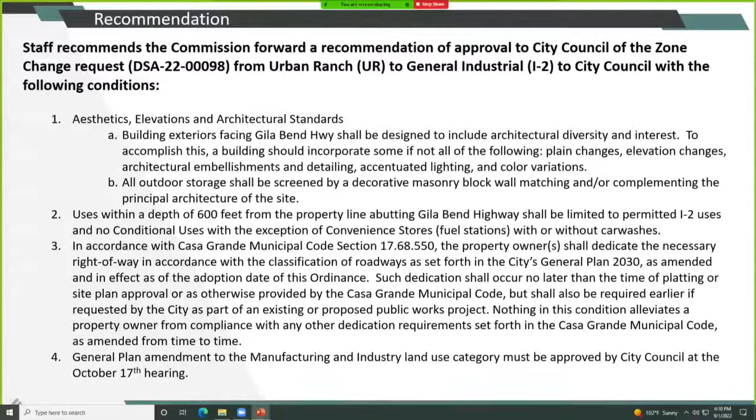Our second condition is that uses within a depth of 600 feet from the property line abutting Gila Bend Highway shall be limited to permitted I-2 uses and no conditional uses, with the exception of convenience store fuel stations with or without car washes. So we're limiting some of the uses happening along that main frontage of Gila Bend Highway. The third condition is our standard right-of-way dedication request. The fourth is that this zone change not be approved unless the general plan amendment to the manufacturing industry category is approved by City Council at the October 17th hearing.

And I'd be happy to take any questions. Questions for staff? No questions for staff?

All right, at this time then, would the applicant and/or their representative like to come forward? Please state your name and address for the record.

Thank you, Mr. Chairman and members of the commission. My name is Greg Davis with iPlan Consulting, address 3317 South Higley Road in the town of Gilbert. Thank you for the opportunity to be here. This is, I think, the third time now we've been in front of you, and we still don't have anything to add, but we'd be glad to answer any questions. We have reviewed the stipulations and are comfortable moving forward with those. So any questions you have, I'd be happy to answer them.

Any questions for the applicant? No? All right. All right. Thanks, thank you for coming down, yeah.

All right, then at this time, I would open it up to the public. Would anybody from the public like to speak to this agenda item?

Seeing nobody, I will close the public portion and bring it back to the commission.

Mr. Chairman, Member Peters. I would like to make a recommendation of the commission to forward a recommendation of approval to City Council of the zone change request DSA-22-00098 from Urban Ranch to General Industrial, I-2, to the City Council with the following conditions that were laid out by the staff. I'll second that motion.

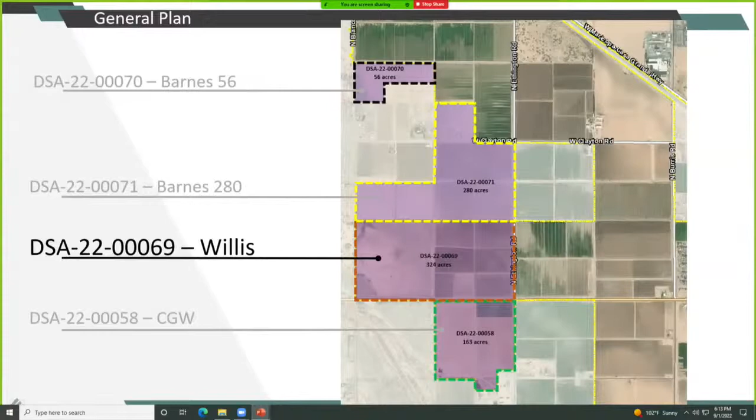You can see the site located here just north of the first site we discussed, 324 acres, heading into the manufacturing industry category. The zoning's going from urban ranch to I-2, similar to the previous request. Again, all the review criteria is exactly similar to the previous request.

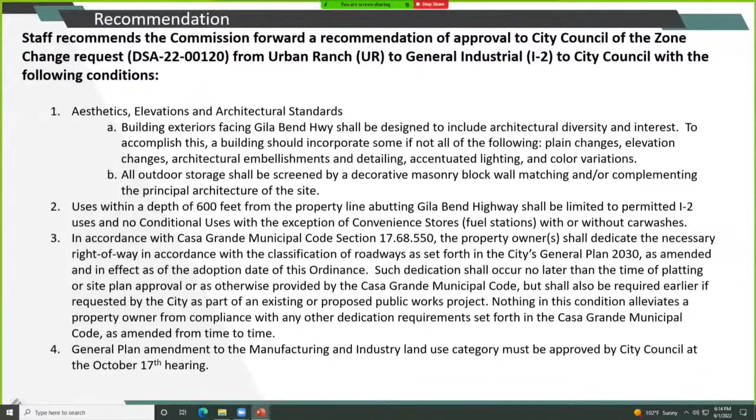In regards to notification, we met or exceeded all requirements and did not receive any comments regarding this request. In conclusion, staff recommends the commission forward a recommendation of approval to City Council of the zone change request from urban ranch to general industrial, with the following conditions. Again, the conditions are exactly the same as the previous. I'd be happy to answer any questions.

All right. Do we have any questions for staff? Okay. This time then, would the applicant and/or their representative like to speak? Thank you for being here this evening.

Good evening, Chairman and Commission members. Cindy Paddock, Hilgart Wilson, 2141 East Highland Avenue, Phoenix, Arizona. I think Joe did a good job summary. Third time we've appeared before you, similar to Greg ahead of us. No new changes, no information. We have no objections to the staff report. Staff's been great to work with, and we look forward to the hearing in October.

All right. Any questions for the applicant? No? All right. Thank you. Thank you.

At this time, I would open it up to the public. Would anybody from the public like to speak to this agenda item? Seeing nobody, I will close the public portion and bring it back to the commission.

Mr. Chairman, I must keep going with this. There you go. It's all yours. I would like to make a motion that the commission forward a recommendation of approval of the City Council of a request by Hilgart Wilson for a zone change DSA-22-00120 from urban ranch to general industrial located at Gila Bend Highway between Bianco Road and Effington Road, with the recommendations as listed by the staff.

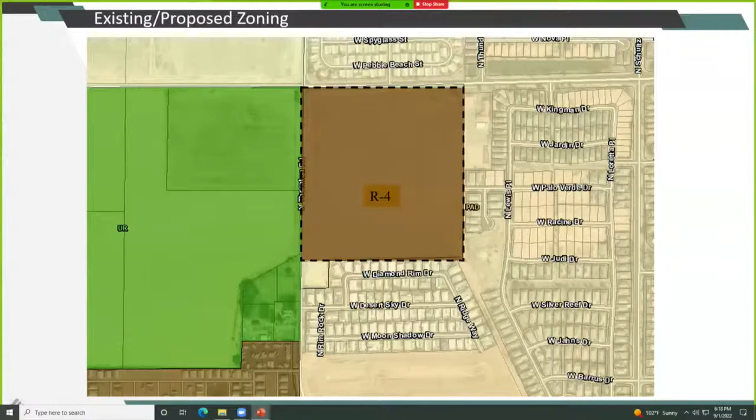In regards to the general plan, currently neighborhoods, but it's processing the request into the community corridor land use category. The existing zoning's R1, proposed zoning is R4. The R4 zoning is allowed in both the neighborhoods category and the community corridor category.

In regards to the review criteria, again, we look to make sure that it's in conformance with the general plan. All of that has been covered in your staff report. We'll just concentrate on the top one, and that's the action is consistent with the city's general plan, including the

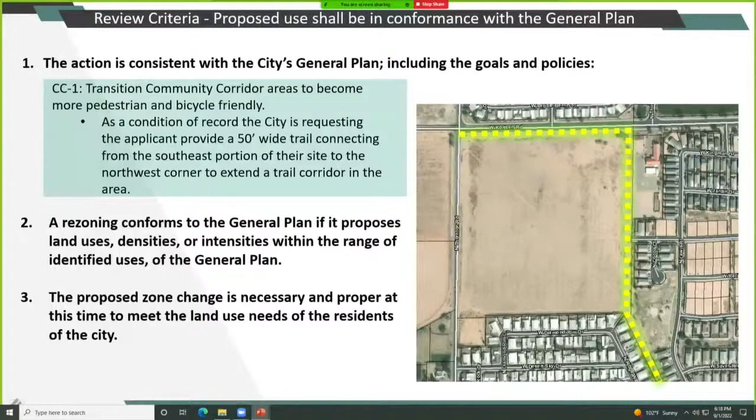goals and policies. CC1 in our general plan goal is transition community corridor areas to become more pedestrian and bicycle friendly. As a condition of record, the city is requesting the applicant provide a 50-foot wide trail connecting from the southeast portion of their site to the northwest corner to extend a trail corridor in the area. You can see that highlighted on your screen where that trail potentially could go. They just need to take it from that far southeast corner to the northwest corner, so they could propose a different alignment, but we think this is probably where they'll end up.

In regards to notification, we met or exceeded all requirements. We did receive 2 responses today and maybe yesterday by email, and the principal concerns were Thornton Road traffic and too much residential growth in the city. We did provide a handout to all the commissioners this evening of those comments we received for your review.

In conclusion, staff recommends the commission forward a recommendation of approval to City Council of the zone change request from single-family residential to mobile home residential, with the following conditions. The first one is the 50-foot trail corridor through the site, and the second one is our standard right-of-way condition.

Questions for staff? Do you have any questions for staff?

She was mentioning the condition, I'm missing the condition of the general plan being approved, but R4 zoning is allowed in both neighborhoods and community corridors, so I did not make that a condition of this recommendation. Okay.

No questions. All right. Well, then, at this time, would the applicant and/or their representative like to come forward?

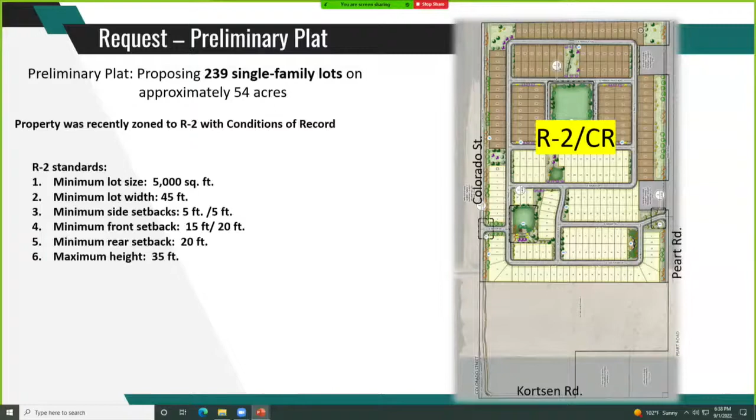When reviewing preliminary plats, there's a number of aspects we look at to make sure the preliminary plat is adequate, one being conformance with the zoning. As I mentioned, the R2 zoning allows a certain size of lot and minimum lot width, which is a 5,000 square foot minimum lot size and 45 foot minimum lot width.

This preliminary plat actually proposes lots a little larger than 5,000 square feet, ranging between 5,175 and 5,750 square feet. There's going to be 130 lots proposed to be 45 feet wide at 5,175 square feet, and 109 lots proposed with a minimum lot width of 50 feet at 5,750 square feet in size.

One of the other conditions of record associated with this R2 zoning is that it comply with particular PAD design guidelines, such as a minimum open space of 20%. This preliminary plat and the associated landscape plan shows an open space of 22%, so it meets and exceeds that requirement.

There was also some particular detail that needed to be addressed with regard to streetscapes, entrances, and perimeter walls, and that has been met during the review of the preliminary plat. Matters such as front yard landscaping, fence returns, and housing product will occur at a later stage. If this were approved, their next step would be final plat, and then at the building permit phase we would have the opportunity to review those other aspects.

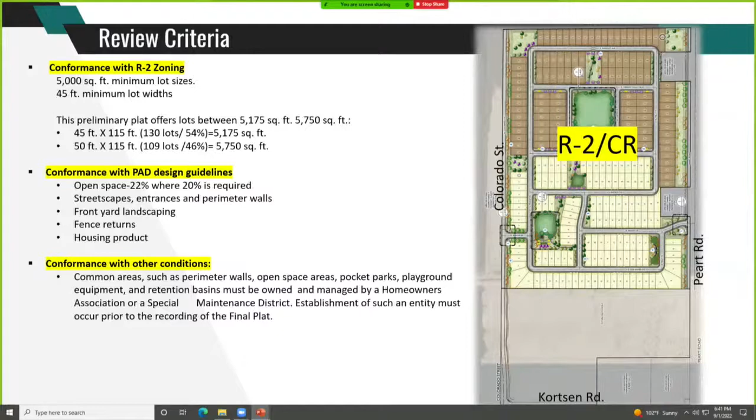However, there is concern about the area shown in blue, the 100-year floodplain. A CLOMR/LOMR will be required prior to final plat approval. That's a process done to place the entire area in a Zone X. One way the applicant proposes to accomplish this is by constructing a flood wall around the perimeter of the subdivision within that 100-year floodplain, protecting it from excess flows and runoff during a flood condition in the Santa Cruz Wash to the north.

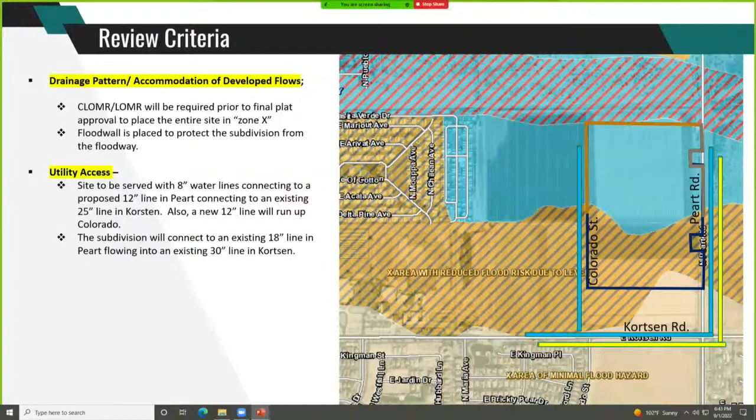The other aspect I want to talk about is utility access. The site is to be served with 8-inch water mains connecting to a proposed 12-inch line in Peart, and it will connect with an existing 25-inch main in Kortsen. They'll also run a new 12-inch water main up Colorado Street for a loop system. Regarding sewer, the subdivision will connect to an 18-inch main in Peart, which will flow into an existing 30-inch main in Kortsen.

The last item we look at with preliminary plats is access to public roads and trails. There are two points of access proposed in and out of the subdivision, one onto Peart Road and the other onto Colorado Street. Colorado Street will be extended north of Kortsen and will run to the northern boundary of the subdivision.

Because of the floodplain issues mentioned, where they're proposing a flood wall around the northern portion of the subdivision, access to the area to the north is restricted. That area is important because there's an existing regional trail, part of the Santa Cruz Linear Park Trail, and there's benefit in providing pedestrian connection to it. So instead of running a link through the core of the subdivision, they're proposing a 10-foot wide meandering path along the east side of Colorado Street up to that regional trail.

They are extending Colorado all the way down to Kortsen, but between Kortsen and the single-family area there's a future multifamily site that's not really part of this development. So the public improvements adjacent to the future multifamily site will be slightly less than those adjacent to the single-family area. There will still be a 40-foot half-street right-of-way dedication for Colorado and curb, but instead of a concrete 10-foot wide meandering path in that area, it will be DG. Once the multifamily site develops, that DG can be replaced with concrete, and that's when curb cuts and street lamps will be set in that area.

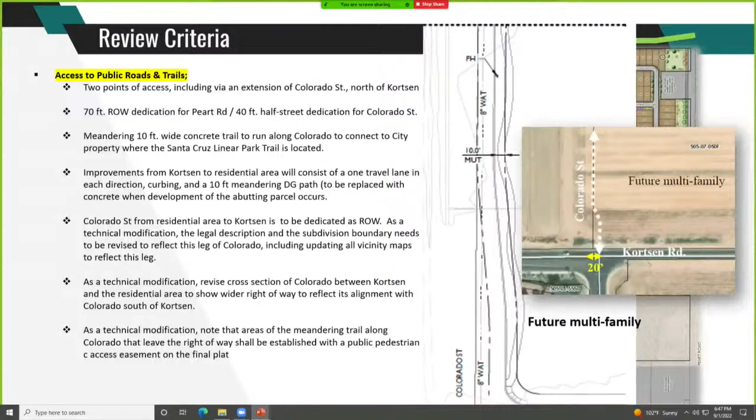The other criteria is compliance with subdivision regulations, which covers a variety of standards. It meets all of them except one requirement found in the subdivision code regarding block length. According to the code, blocks cannot exceed 600 feet, or 12 times the minimum lot width allowed in that zone district, which in this case is 540 feet. They have one street that is almost 883 feet, which prompts the need to request a subdivision variance.

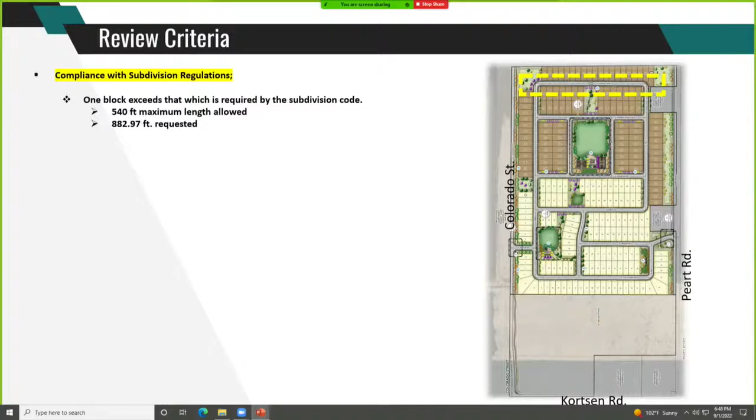The code does allow a variance to be requested. It would need to be granted by City Council, but Planning Commission would be making a recommendation to Council in association with the review of the pre-plat.

In reviewing the criteria, we found there are measures to help address the fact that it's an extra long street. You've seen a number of these requests in other presentations, but they are providing traffic calming measures known as chicanes in the center of the block that narrow the street and improve pedestrian connection. They are also providing a central open space area, so even though the block still exceeds 600 feet, you would essentially meet that requirement if there was a street there in lieu of the open space. But we feel the open space area serves a much better purpose, since that street wouldn't provide any real benefit for vehicular connectivity. This way, by providing the open space, it essentially breaks up the block, and there will be a pedestrian path through there.

I mean, to be better informed - you can see where, between the street, the drivable portion of the street and the sidewalk, there's an area that bumps out. But if you were to query chicane online, it's going to pull up not just that example, but sometimes it's done with plastic bollards and such. That's not actually what we're describing when we talk about a chicane. We're talking about a landscaped area that mimics the photo shown there.

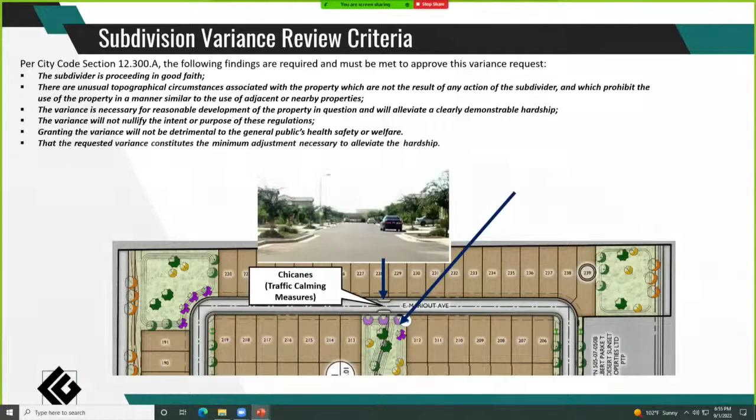I think we'd all appreciate if you could do a little look and see if there's something nearby that we could see, and share it with all the commissioners.

Sure. These are getting longer too. Yeah, it's just like when it was one or two, that was fine, but it seems like it's something - I'd just like to be better informed. I can see it, you've got great presentations, I'm not knocking them at all, but it'd be great to be able to see it actually in place.

Okay, thank you. So I will, but also real quick - I guess it's not technically a chicane, but within the Mission Royale neighborhood, I don't think it's actually Agua Fria - I think Google has the wrong street name labeled there - but it's the most northerly street just south of Florence Boulevard in the active adult community.

They have a mid-block roundabout. So although that's not a chicane per se, that's a traffic calming device, because such a long block creates a speedway. So having that infrastructure there, that little roundabout, it slows the traffic, albeit maybe briefly, but it helps control the speed.

If you could share that with us, that'd be great if you have any ideas about that. It's great too if you forgot something and needed to turn around and go back to the house real quick - did I shut my garage?

Any other questions for staff? You guys have? No? I just have a couple concerns.

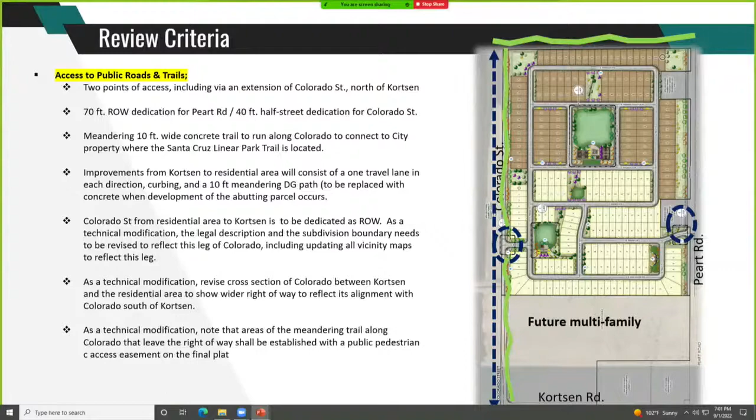So I believe the Dollar General store is right in there, and it has a cross-access, if I remember, going over to that corner where the well site is. That's on the very, closer to Kortsen. Right, because the Dollar General sits right on Kortsen. Yeah, so as I remember, we made them do a cross-access to the corner.

No, he was talking about how to get—you're talking about the multifamily, how to get in there. Well, so if you took the multifamily and said, okay, where's their ingress egress? You're talking about the well sites north, right? Yeah, he's talking about both—on PERT. The well sites on PERT, depending on who you are and how you want to pronounce that, but I call it PERT.

And then, similar to this subdivision, if they were going to do an ingress and egress, and they did one on Colorado and one on PERT, now we've got those two entrances very close to each other. If the PERT ones—I'm not as concerned about the Colorado one, but that's going to be a heavy flow, a lot of traffic.

So I'm not sure what you're asking. My first concern is, do we have a conversation about moving that ingress egress on Peart further north? And then my second question, which doesn't have anything to do with that, is I just don't know what the rules are for allowing the well sites access off of Peart, and does that complicate lots of entry points.

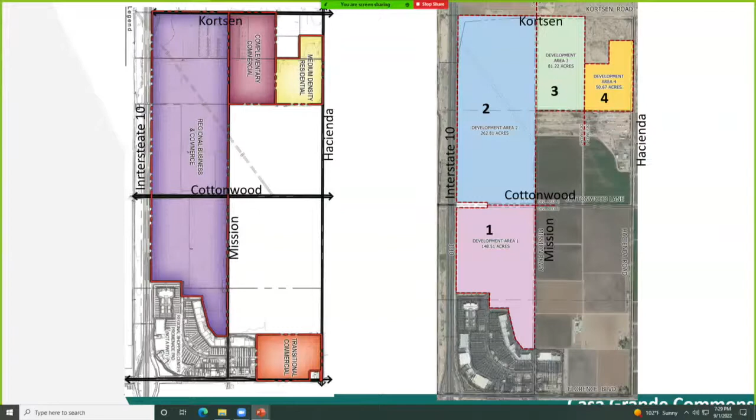Really the impetus for what's driving the amendment is the fact that there was a general plan change done a number of years ago. The current PAD was approved when this area was designated as commerce and business in the general plan, and at the time, commerce and business did not allow any residential development as part of a PAD.

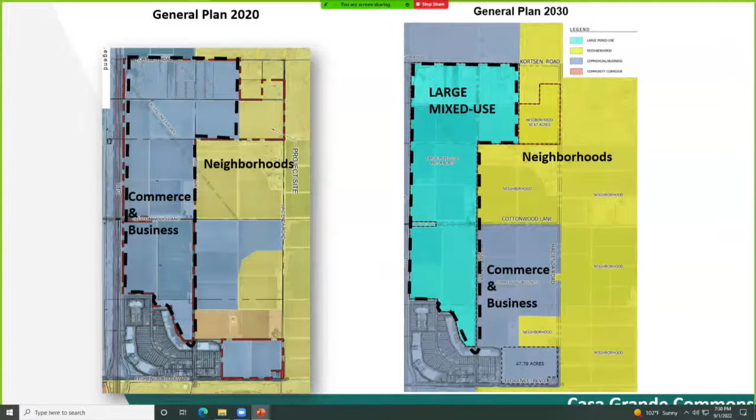In 2019, we created a large mixed-use general plan category, which does allow a vibrant mixture of different uses. This area actually did undergo a major general plan amendment at that time to place the bulk of the PAD into large mixed use, and that was carried forward with our general plan 2030. So now this next step is for them to revise the PAD and introduce uses that are in line with that approved large mixed-use general plan designation.

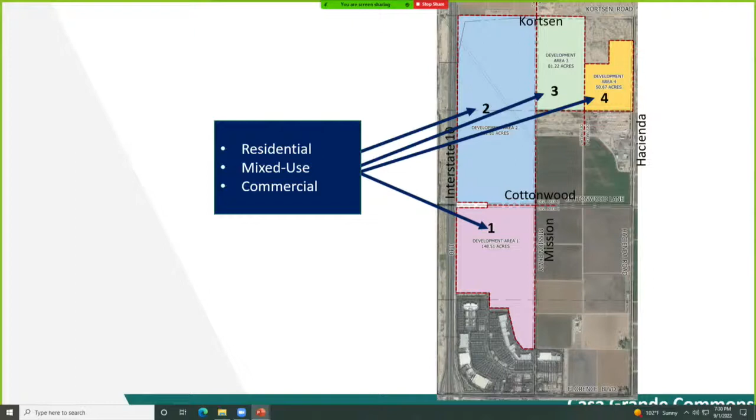So in all 4 of the proposed development areas, it will allow a mixture of residential, mixed use, and commercial. The general plan allows for that, and you're going to see that mixture. But in the 2 development areas next to the interstate, it's actually going to also allow industrial into the blend.

Another aspect of the large mixed-use category is because it is designed to contemplate a mixture of all kinds of different uses, there's some thresholds on that. So for example, up to 50% of the large mixed-use area can be developed residentially. 20% of that area can have high-density residential up to 40 dwelling units per acre. 30% of that area can have a medium density of up to 12 dwelling units per acre. And then any of the residential area can have a density up to 6 dwelling units per acre.

50% of the large mixed-use area can be developed for industrial purposes, and up to 70% of the area can be commercial uses. So if this PAD is to be approved, this will actually be the first PAD that utilizes and takes advantage of this new large mixed-use general plan category.

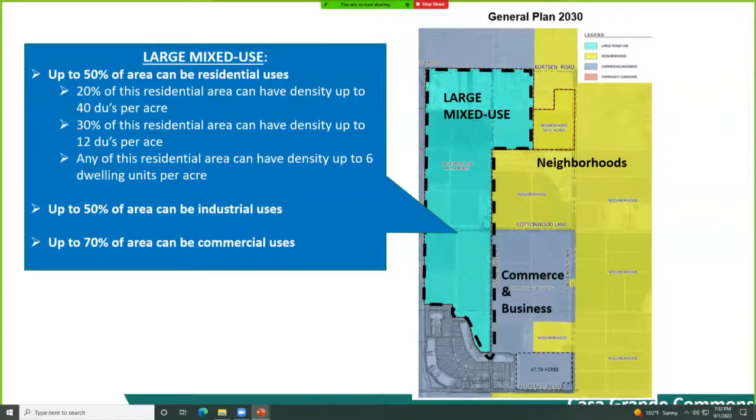We have a couple of other sites that are in the large mixed-use general plan designation. Phoenix Mart is one - even though it's outside of the city limits - Atessa is another. But their zonings do not contemplate what's allowed within the large mixed use. So if this is approved, this will be the first PAD that utilizes this general plan designation.

When reviewing amendments to PADs, these are the criteria that have to get evaluated, and I just want to talk about these 2 highlighted items. The first one is the interrelationship of the plan elements to conditions both on and off the property. In order to discuss that, though, it also sort of interweaves another criteria, which is vehicular connectivity, because they kind of go hand in hand.

This site is immediately next to a wide expanse of I-10. I mean, it goes from just north of the promenade all the way up to Kortsen. So it has a lot of exposure to the I-10 corridor. And so it also has the opportunity for good connectivity to I-10 because of the existing interchange at Florence and State Route 287 and the planned interchange at Kortsen and I-10. So the uses and the mixture of uses will really take advantage of that highway traffic and the opportunity that can come about because of that adjacency.

It also has good additional other connections, such as Cottonwood dividing the site to the north and south, and that's considered a principal arterial there. And then you have Hacienda on the far east, which is designed as a minor arterial. Mission Parkway will also extend, and then Promenade Parkway is also shown to extend to serve as a frontage road between Mission and I-10. So this will have a really good, thorough vehicular connection route, and so that helps address the mixture and density and intensity of uses that are proposed.

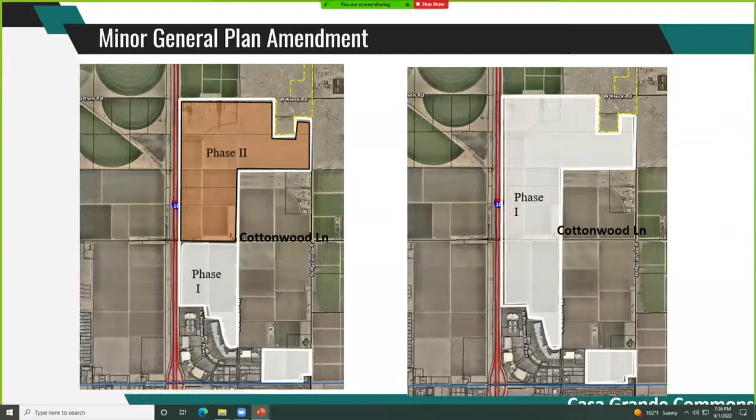Because the north half of the PAD, north of Cottonwood, sits in growth area phase 2, we can't contemplate an amendment to the PAD without putting the phase 2 area into growth area phase 1. So on the left is the current condition, on the right is the request to put the whole area in phase 1. The difference between phase 1 and phase 2 basically speaks to the availability to serve that particular area with city services and whether there's adequate infrastructure in or nearby the area to serve the site. Phase 2 areas are typically further away from the core of the city and can't be as easily served, and phase 1 sites are areas that are more easily able to be served.

When reviewing the general plan criteria for minor general plan amendments, these are the criteria that have to be evaluated, and I'm going to specifically speak on the two highlighted items.

Firstly, with regard to CAWS, certificates of assured water supply, this PAD will be developed in such a way that it won't trigger CAWS. They're not going to propose a subdivision where they're taking a parcel and creating more than 5 lots in the immediate future. It has some flexibility to where in the future, if the rules and policies change, there's the ability to potentially do that if necessary, but otherwise they can develop it without CAWS, and basically they could enter into a water service agreement with Arizona Water Company to serve the development that's proposed. What triggers CAWS is if they were doing a more than 5 lot subdivision to a parcel, but they have it proposed in a manner that that's not necessarily going to happen. They would just simply be able to develop large parcels with a water service agreement with Arizona Water Company.

The other aspect to look at is the sewer and the ability to serve the site with wastewater. All of the area shown here is growth area 1. You can see there's a number of either existing or proposed developments that have been put into growth area phase 1. Some are a little bit further out than others, but ultimately we determined that this was appropriate to be in phase 1 because there's a limited amount of wastewater availability here, or otherwise there's an alternative solution, specifically like for Post Ranch, down in that southeast corner.

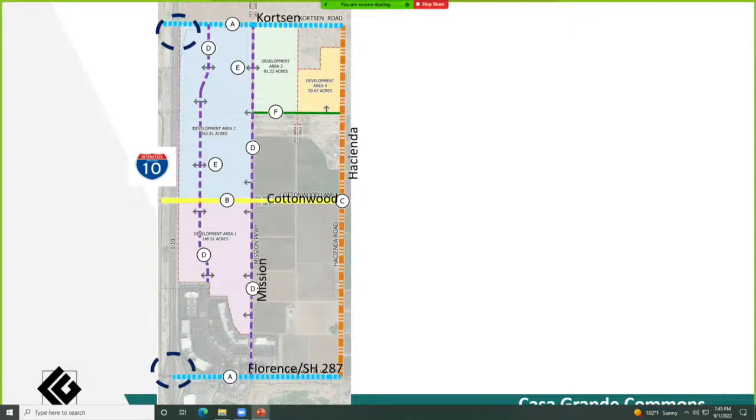Dwayne? No, I was just kidding. Yes. Oh. Well, although all joking aside, I think maybe the applicant can speak to that.

Okay, but my quick thought on that is that I think that road serves a good purpose in general because it does provide connectivity from the Promenade up to Kortsen. Yep, I don't disagree. Mind you, that aside, your concern as well is that there's going to be truck traffic on it, and could that negatively impact the Promenade?

But my thought is that, although it's hard to predict exactly the travel behavior of trucks, absolutely, I think as it starts to go into a more congested area, they would be less inclined to go through a shopping center, essentially, if there are adequate other options, and there will be, because they do have the ability to go along Cottonwood. These little access arrows, although they're designed to just be potential, maybe local streets, at the time of evaluating a major site plan there may be the need and the call for an additional connection between Promenade and Mission, perhaps not all that far north of the north boundary of the Promenade Mall, just to get some of that superfluous traffic not through the Promenade, but over onto some other roadways.

Sure, and fully realizing that this has got a lot of steps to go through before we can answer any of those questions. It just, when I saw that, I was kind of like, oh, here we go. Anyway, thank you.

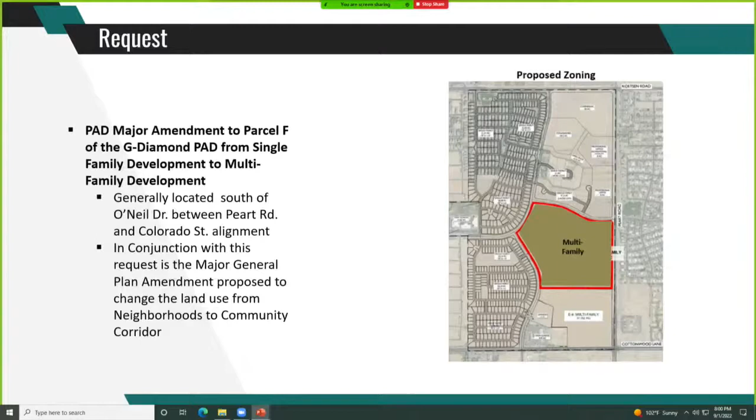So this is the PAD major amendment to parcel F of the G Diamond planned development, from single-family development to multifamily. The site, as noted previously, is located south of O'Neil Drive between Peart and Colorado alignment. And again, this is in conjunction with the request for the major general plan amendment to change the land use from neighborhoods to community corridor.

The staff report goes into detail regarding all the PAD review criteria. I'll go over the two highlighted items. With regards to the general plan amendment, the change to community corridor does allow for density up to 25 dwelling units per acre. One of the goals of the general plan is to encourage variety in neighborhood design and development patterns, and action step H-2.1 suggests encouraging a range of neighborhood types, densities, and building design within a planned area development and throughout the city.

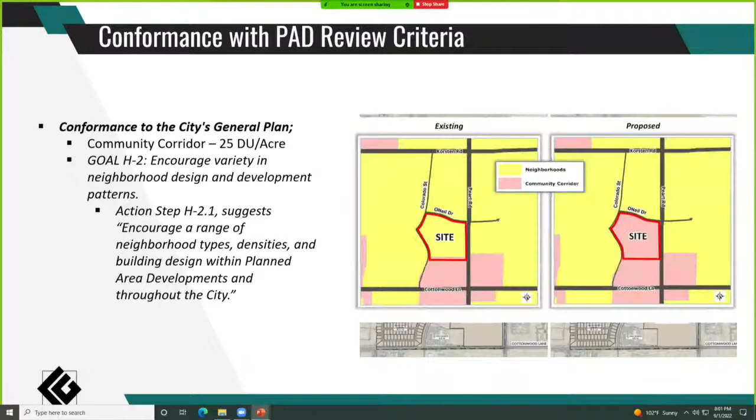With regards to the city zoning ordinance, it will be subject to the PAD residential design standards for multifamily. This includes limiting multifamily to 28 feet in height when adjacent to single-family development within 50 feet. Again, this will be evaluated at the time of major site plan.

This is the conceptual site plan, and the major site plan was just submitted this week for the portion to the west highlighted in red.

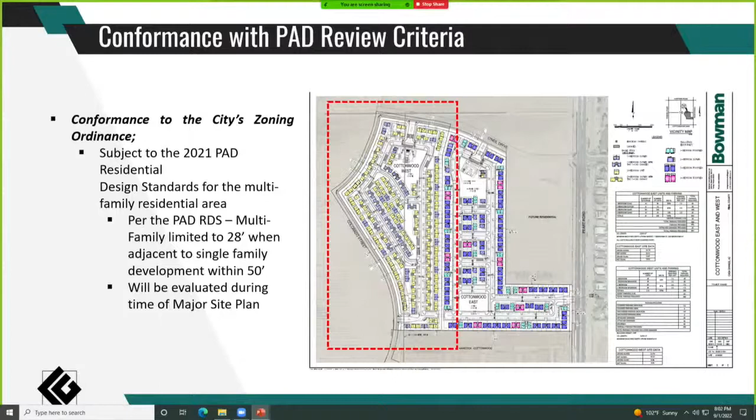Regarding notifications, city staff and the applicant exceeded all the requirements, and I have not received any comments to date on this. So with that, staff recommends that Planning Commission forward to City Council a recommendation to approve the G Diamond PAD major amendment request, DSA 22-0081, with the following conditions of record, including the major general plan amendment pending approval to the community corridor land use category by City Council at the October 17th City Council hearing, and our right-of-way conditions. Happy to answer any questions the commission may have.

I know something about this one. Okay, good. But I would like to show that with this development, it will allow Colorado to connect to the existing PAD development of G Diamond, connecting to Cottonwood to Kortsen on Colorado. So Colorado will go from Cottonwood all the way to Kortsen. And O'Neil would also be developed all the way from Peart to Trekell through the Red Diamond plat currently underway, as well as with this development. That will help with traffic in the area — I know we get a lot of that with regards to legacy.